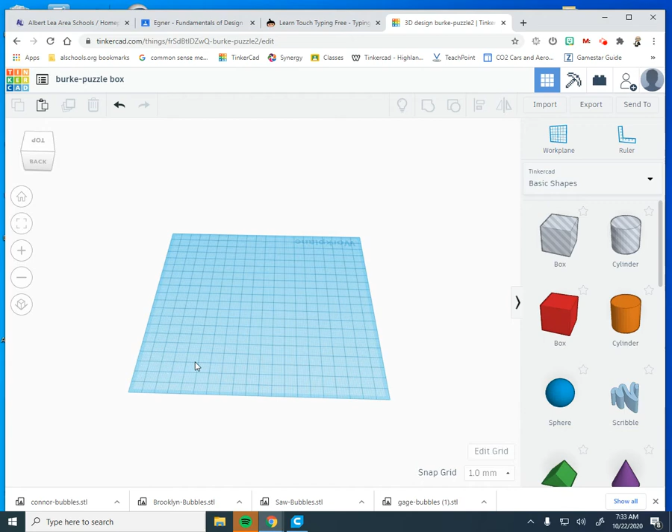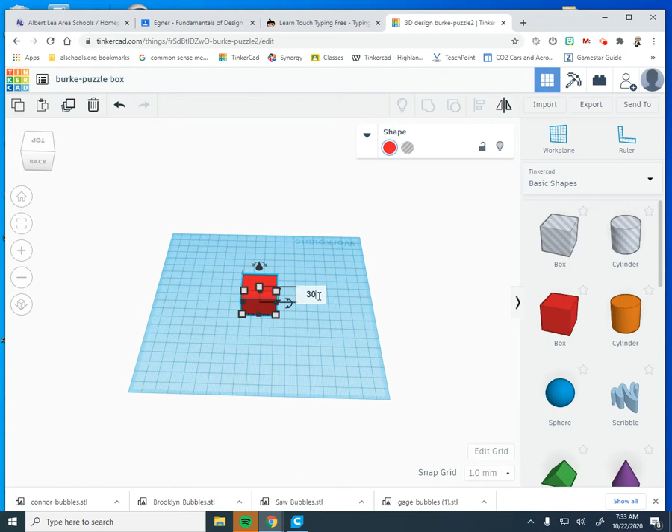Now you know that your cube, your block puzzle, is 30 by 30. So if you make this the base of your block, that's the exact size of your model, 30 by 30 by 30. Unfortunately, we can't fit something that's 30 by 30 by 30 into something that's also 30 by 30 by 30. So we want to give ourselves a little more space.

If we make this box a little bit bigger, let's say 35, that'll give us 5 millimeters on either side. So now we have a box that's 35 by 35 by 35.

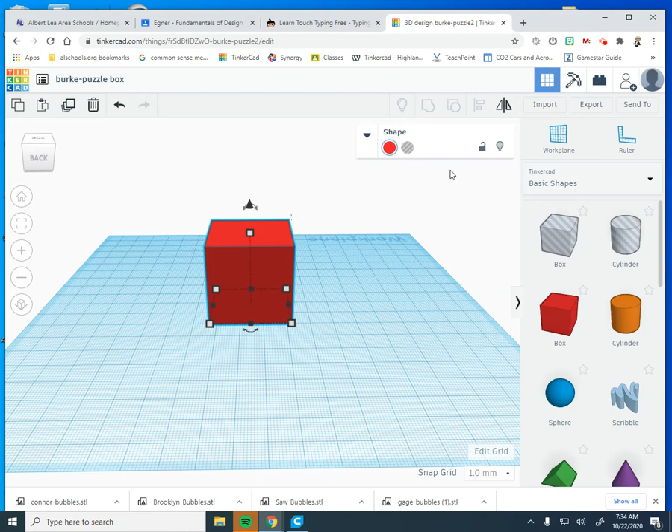If we have something that's 5 millimeters less all the way around, we can fit it in. So here's what we're going to do: this is what's going to need to hold our shape, so we'll turn this into a hole and keep it off to the side for right now. We know we can fit something that's 30 by 30 into there.

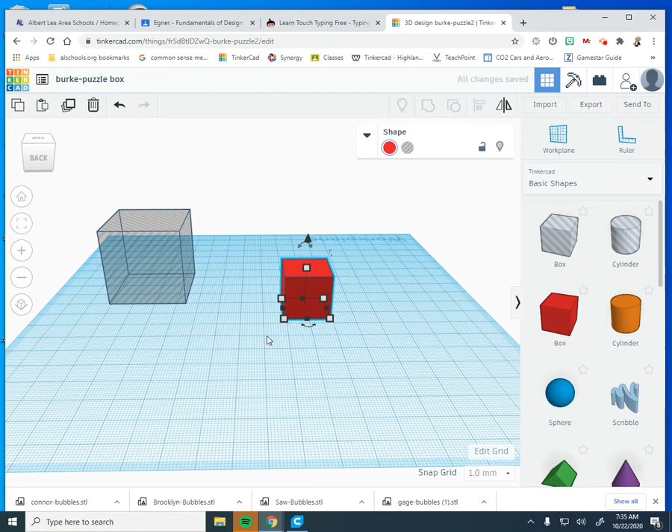So now what you need to do is think: okay, that's my hole, what am I going to put it into? We're going to put that into another box that's going to be our container. We talked about the maximum size your box could be, which I gave you as 40 millimeters by 40 millimeters by 40 millimeters. That's the biggest your box can be.

Now, simply put, this is our opening that's going to have everything in here. We could even make this a little bigger since this is a 40 box, or make the box a little smaller if I wanted to. But as it sits right now, I'm going to bring this box over here.

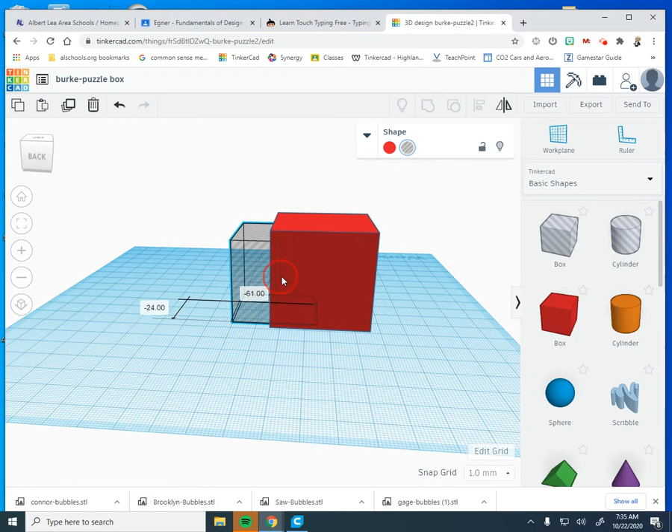When I bring it in here, it looks like it's going to disappear, but I'm going to use my align tool to make sure everything is lined up directly to the middle, front and back, left to right. But then I want to align this to the top, because the way it's set up now, if I go underneath, my box will print upside down and I'll have a bridge that causes printing problems.

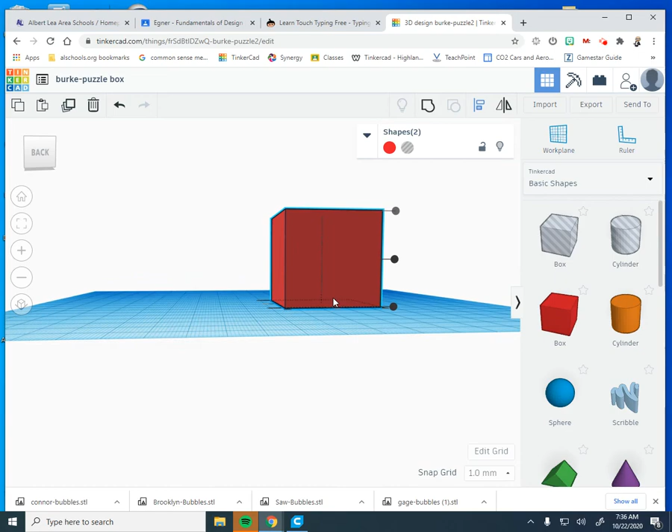So now that's brought my 35 millimeter opening up to the top, and I have 5 millimeters of space underneath. If I wanted to, I could even make this a little bigger, a little deeper, but I think that looks pretty good.

So I've got everything lined up, and I'm going to group those two shapes together. Here's the box I just created: it's 40 millimeters wide by 40 millimeters wide, and this box is going to have an opening of 35 millimeters all the way around.

Now your next thing is to figure out: okay, what am I going to do for the rest of this box? You know the opening here is 35 millimeters, that's what we've got for the opening of this box.

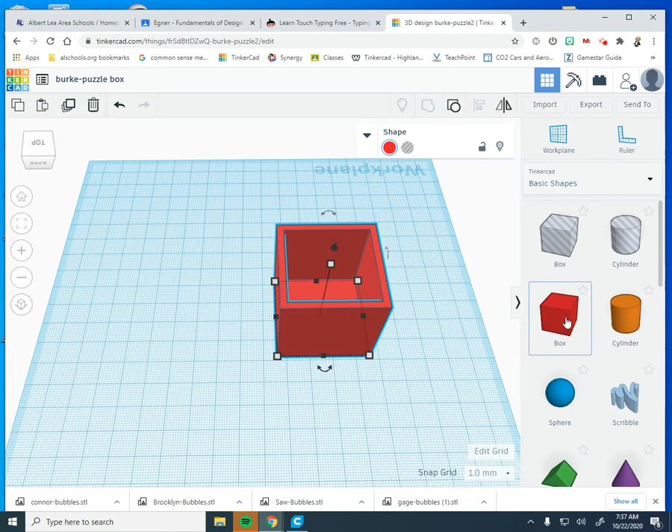So what we could do here, there's a couple ways we can do this. I'm going to bring out another box, it's going to be my lid. And I want to make my lid nice and short, so it just sits right on top.

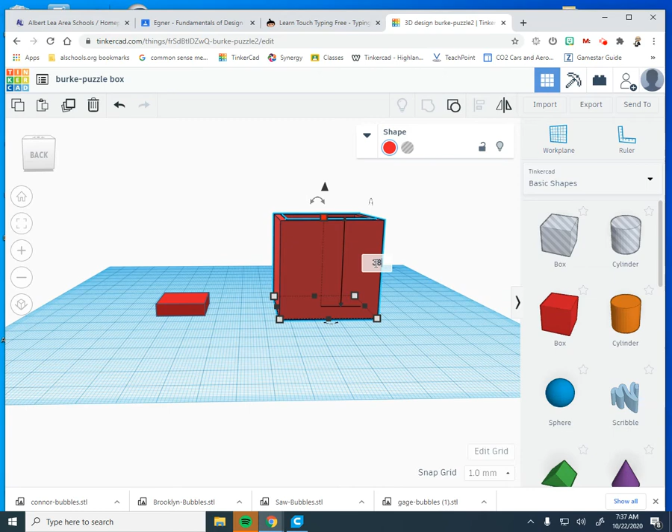Now you have a couple of options or choices you want to make with your lid. Remember, the max it could be is 40 by 40, and this is already 40. So if I'm going to put something on top of it, I might want to make this a little bit shorter. So I'll make this 38.

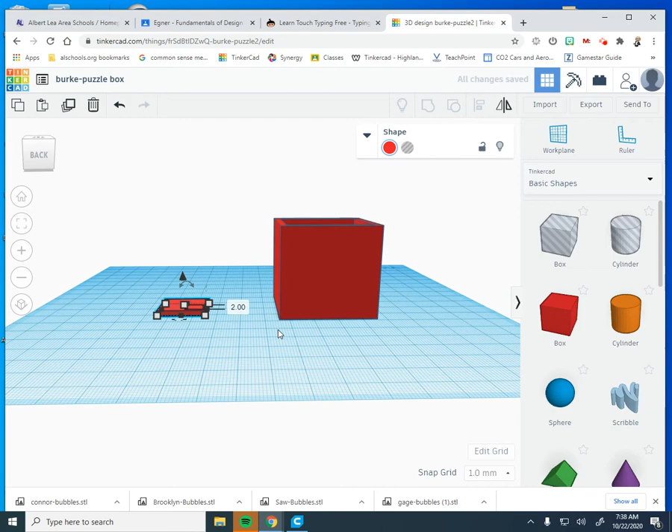So 38, and I'm going to make this 5. So 38 plus 5 gives me 43. That's still going to be too long. So I could make my box lid 2 millimeters tall, and that would give me 40 millimeters. Now this will make it so my box could sit right on top of it.

Now, here's what you're going to do. This opening here, remember my box is 40 millimeters around, so there's two ways we can look at this. I can make this 40 by 40, and here's my box. My box would sit right on top of it.

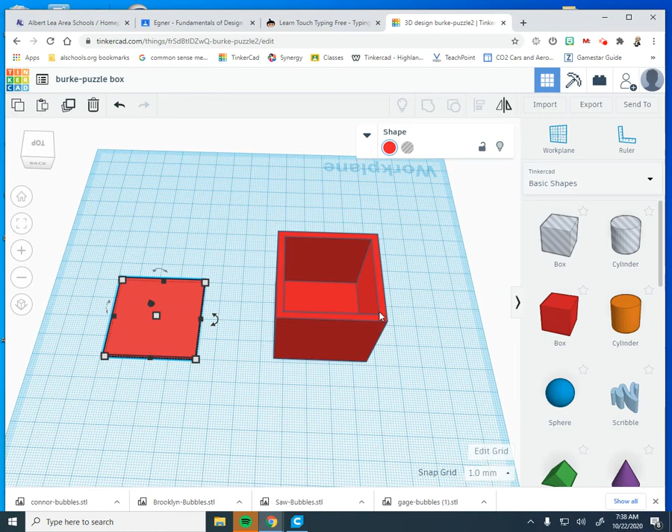But what else I can do, and here's where this gets interesting, is my opening here. Remember, this opening is 35 by 35 by 35. So there's two things I could do here. One, I could raise this way up, and then what I would need to do is cut out another box shape to put in here.

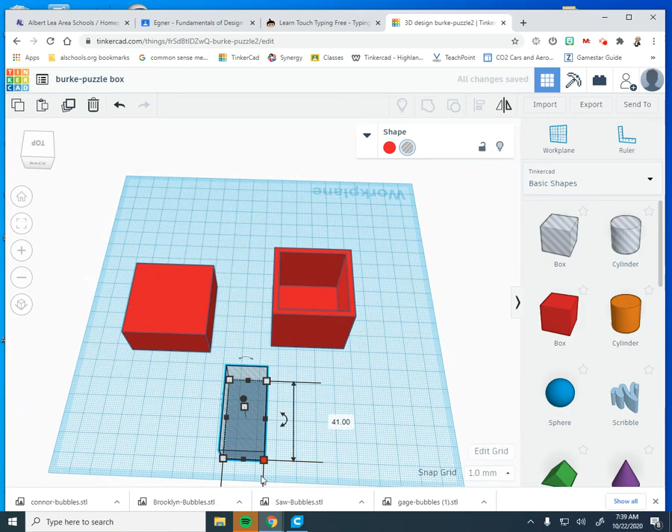So remember, this opening is a 40 opening, so I'd actually need to make this a little bit bigger. So I would make this 43 by 43, so it's going to overhang a little bit. Change this to 41 by 41, and then I'll make this nice and tall here, and line this up right in the middle of it.

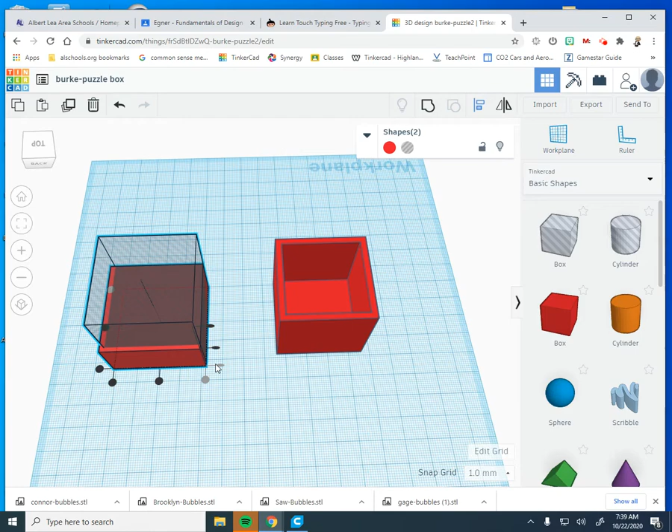Let's line this up, middle, middle. So that's lined up directly in the middle. Now what I want to do is—see, it'll cut a hole all the way through. I don't want to do that. So I'm going to raise this one up just a little bit.

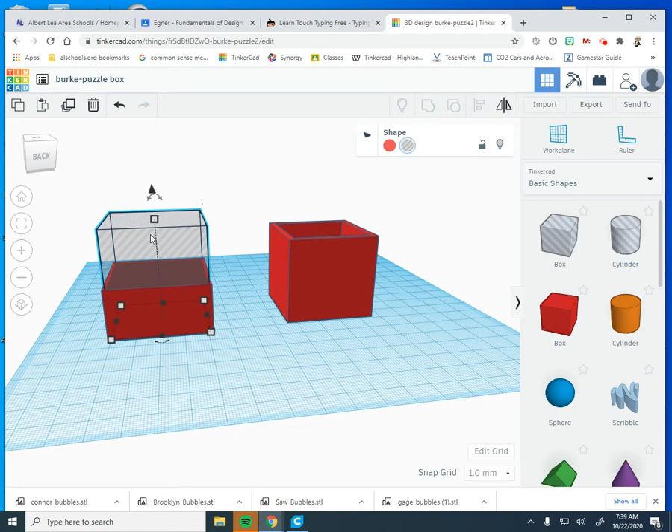So that this comes straight up, so I've got some model underneath it. So remember, we're looking at—there it is. So I got 2 millimeters underneath it.

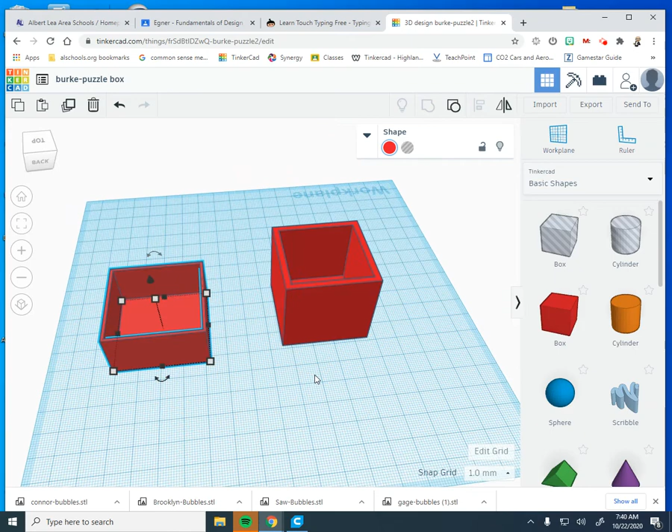Now what I can do is, if I group these two together, I've created a top that is wider than the bottom, so that will go over top of it. So it will fit over top of the box. So that's one way that you could create the box top.

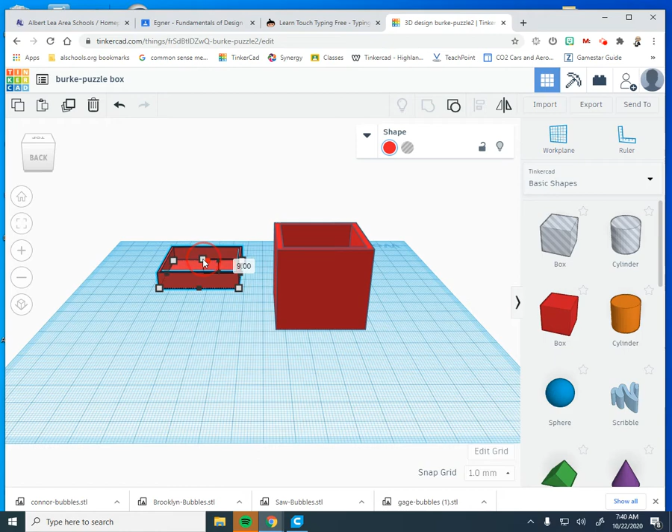And then you could go through and add different shapes or put a hole in here. If you're going to put holes in the side of your box, or put text, or put your name, or other things like that, you want to make sure—and then I could change the height of this. Maybe I only want this lid to be just a small lid, so I can put it right here so it comes over the top just a little bit. But you put your name on the top. You could do all kinds of things.

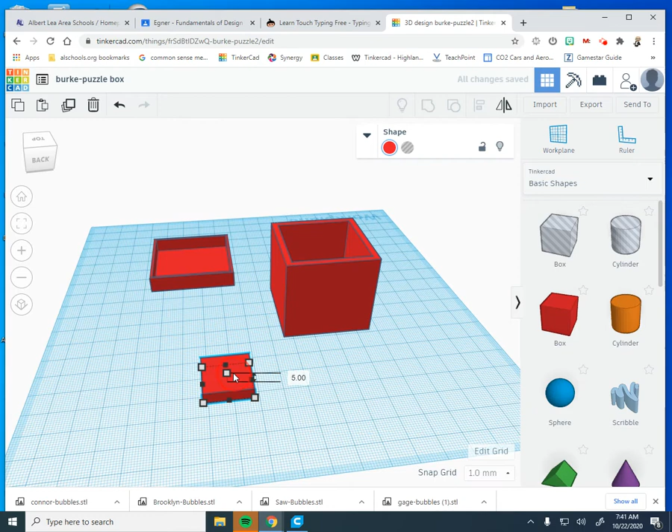Now, another option for a box lid would be to make a box lid that sits right inside. So we know right here that this opening is 35 millimeters. So what we're going to do here is we're going to make this nice and short. You'll follow me here on this one. We're going to make this 34 by 34. Remember, we talked about if you're trying to make anything that fits into something snugly, well actually we'll do 34 and a half.

With tolerance, you want to make sure that you've got some space, so this 34 and a half is going to fit right in here. So we're going to move this out right here, and then I'm going to bring another box in and drop this, making it just a nice 2 millimeters.

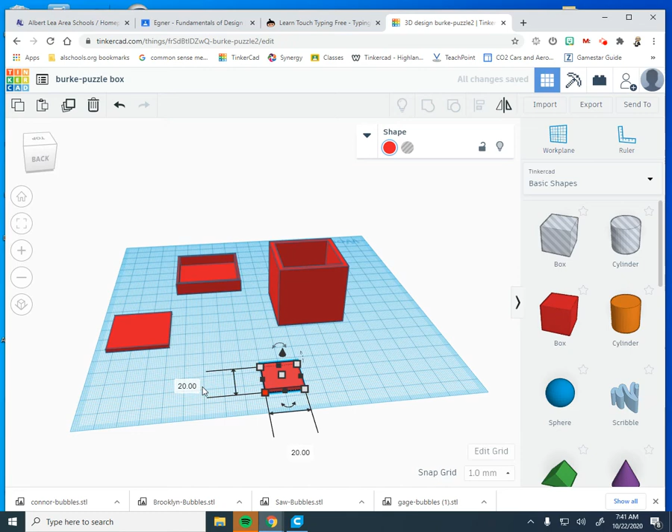This size is 40 by 40, right? So we're looking at the size of this one, 40 by 40. So I'm going to make this the exact same size, 40 by 40.

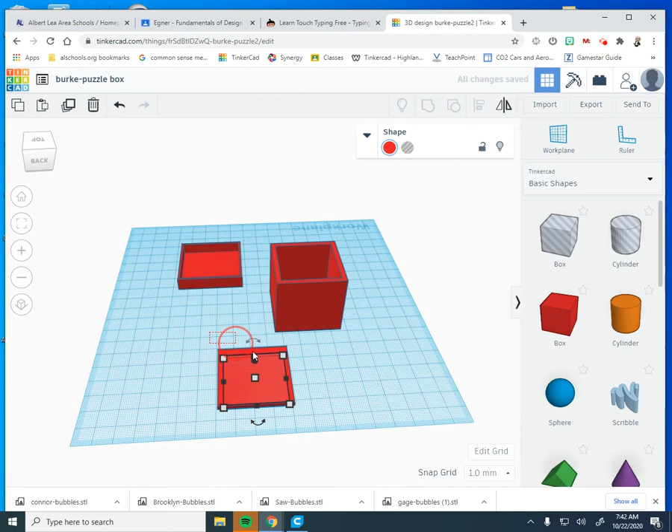Okay, now I'm going to take this one and put it in here. What we're going to do is use the alignment tool again, and I'm going to align this so that it goes to the top.

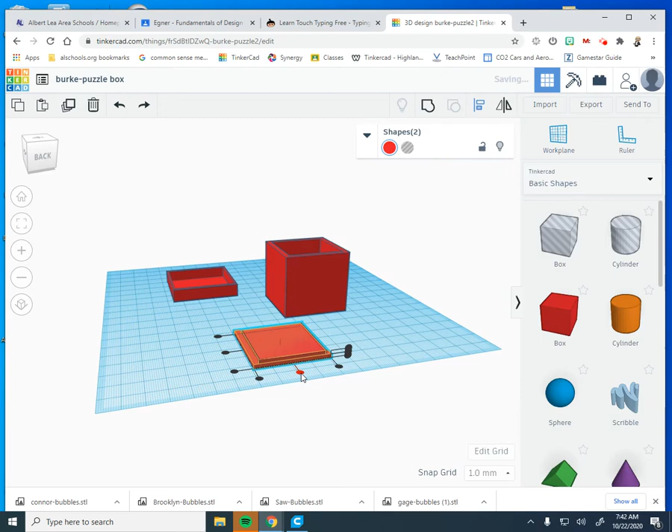Oh, I want to raise that one up a little bit so that it's up a bit. And we're going to align these two shapes. Align that, align that—oh, I'm going to undo that, go back to the way it was. Align these shapes up so that it's centered and centered.

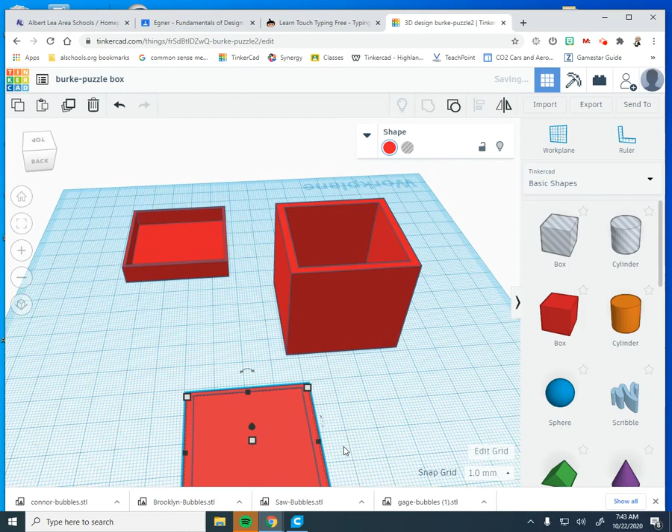Now what I can do is group these two shapes together, and with that one raised up a little bit, I've created a box that'll fit inside. So this box goes on top, and this inside lip will actually rest inside the box to keep it from sliding off, but the top will look more like a flush type lid for the box.

You really have two types of lids for your puzzle box. This one has a little bit of an edge that's just going to sit right inside—it's almost like a plug that plugs it in. This other lid type will sit over the top of it and cover it up.

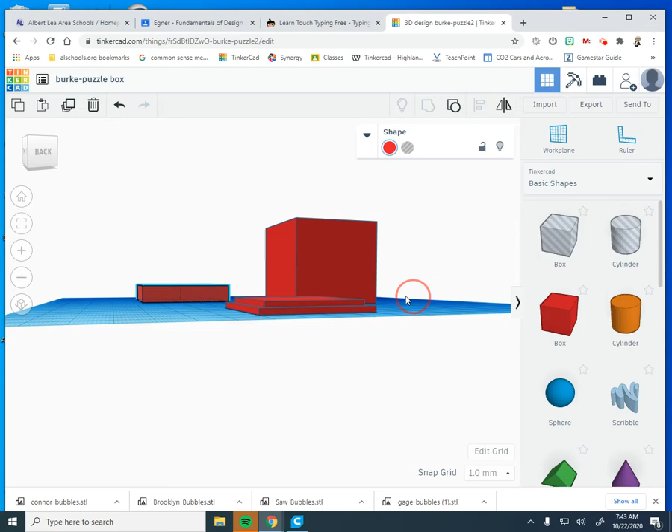You're going to make sure that your lid is nice, tight, and neat. Add some customization to it—you can put 'puzzle' on the side and text, really add some flair to this.

Make sure that any openings you make, holes or anything like that, don't let your puzzle pieces fall out. The worst thing would be carrying your puzzle around and the pieces fall out of a hole on the side of the box because you've got a big hole in the side.

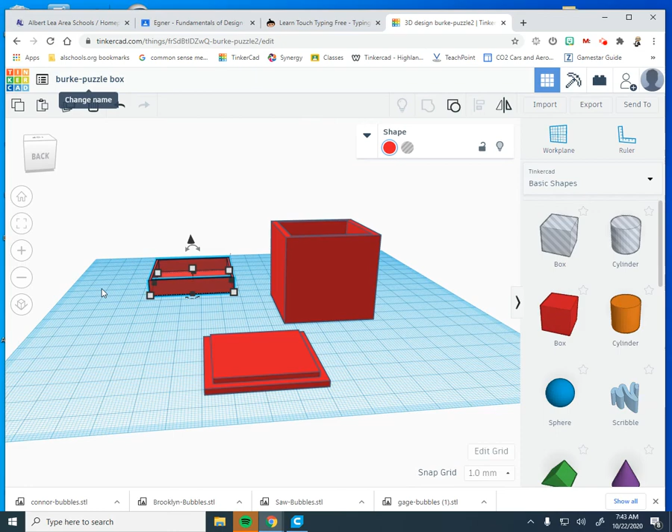So that would be how you would create your puzzle box, and you're going to title it your name, puzzle box, and submit the STL file that will have just one lid.

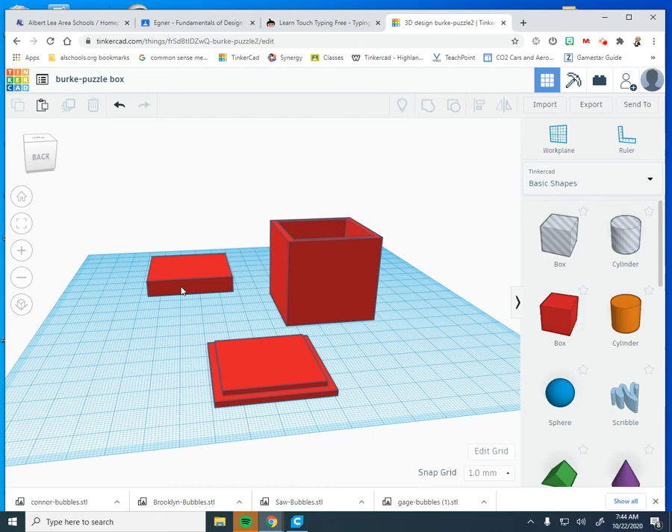Again, look at how all these lids are oriented to print the best, right? If I flip this over, this is going to print poorly because I want as much of my model in contact with the build plate—this blue work plate here. With this one, I've got just the edges, and the top part, if I look underneath, is elevated, so that creates essentially a bridge, and my plastic is going to droop.

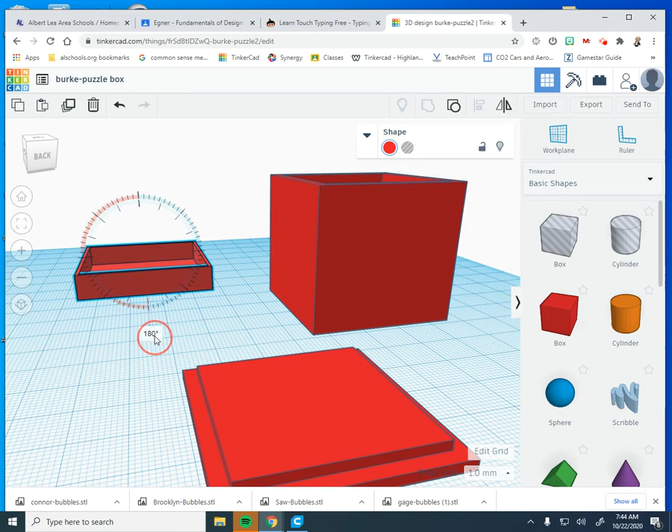So you want to make sure that when you submit your model, your puzzle box, everything is laying flat on the work plane. If this was my model, I would put my box lid right next to the box, and I would have just one of these—so one of these wouldn't be here—but this would be how I would turn this in so my model is nice and easy to print, so I can print multiple side by side.

So that's going to be a great way to make your box for your puzzle. Good luck.